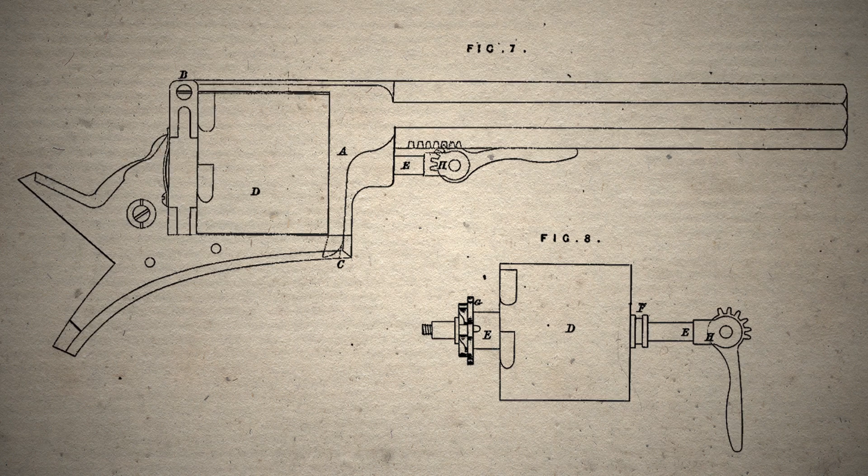Tranter would try his hand at a break-open with his 1868 patent, which featured a tip-up design using a manual ejector. In 1869, he'd further simplify this, although still an awkward affair. I'm uncertain if either of these designs were really produced.

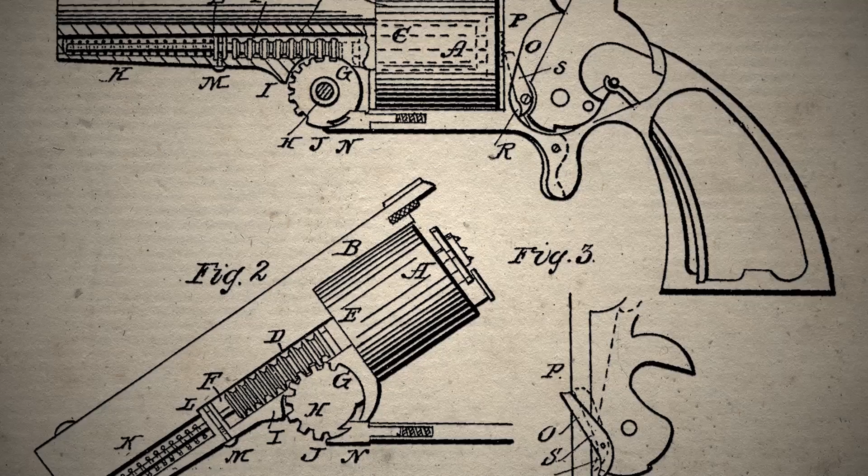A much better method can be found in Charles King's US 1869 patent for a rack and pinion extractor system, which automatically pulled spent cases from the cylinder when the pistol was broken open. This would famously be purchased by Smith & Wesson and used in their No. 3 series of top break revolvers. We've already explored this, at least as far as the Russians were concerned, although I'd like to revisit them again someday with fresh knowledge. The No. 3 Army-style revolvers would be well established in the market by 1874.

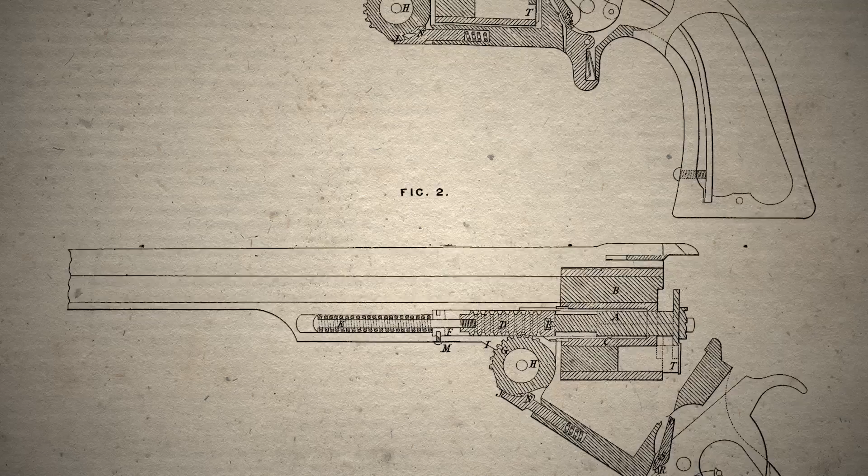Now I want to point out that today's episode is about British revolvers, which means Tranter will only be constrained by British patents at that time. Smith & Wesson rarely filed outside the US, but they did do so in this case with an updated King's patent in British hands still in 1869. The Smith & Wesson action wasn't exactly a strong seller in the British or European market though. Many felt the top break was interesting, but the extraction mechanism was complicated and frankly somewhat weak. But it wouldn't be long before a simplified action would emerge.

The earliest instance I can find of this is in the 1871 Belgian patent by Philippe Counet. Here, the complicated rack and pinion has been replaced with a simple finger. The top strap was latched with a crosspin, which proved to be a little weaker than desirable.

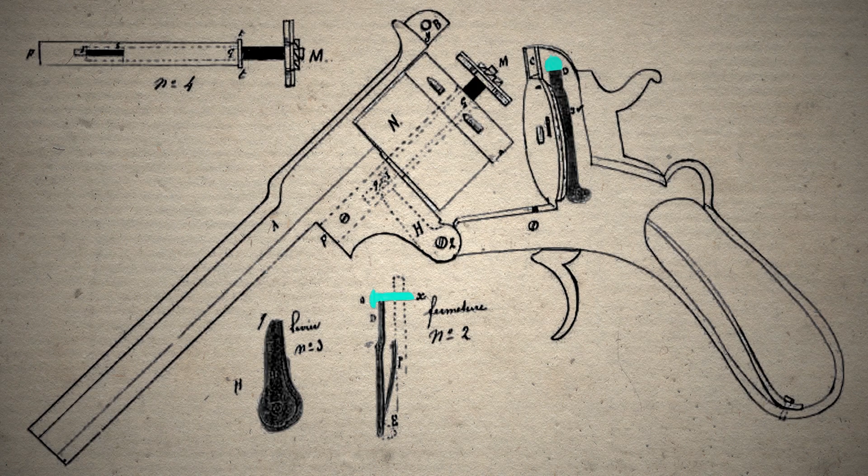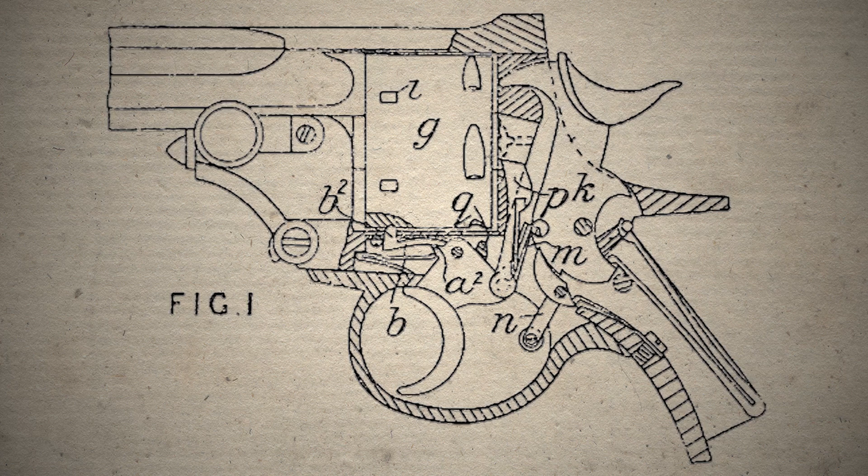Now, the Counet patent would actually become very popular in the British market, though it was marketed under the name Pryse at that time. I'm actually still researching the matter because, while there is a Pryse patent that shows the same top break mechanism, it is only meant to cover a specific cylinder stop. I've actually yet to turn up the Counet top break system in the British patent records as of this recording.

Regardless of how it was protected, the Pryse system would actually be picked up by several Birmingham manufacturers, eventually including the then just expanding firm of P. Webley. It's hard to say when this pattern first emerged in the British commercial market, obviously sometime between 1871 and 1877, predating our Tranter today for sure. The rapid extraction and loading system was popular not only with private buyers, but also when chambered for Army Standard 450 Adams cartridge, it saw brisk sales as an officer's private purchase.

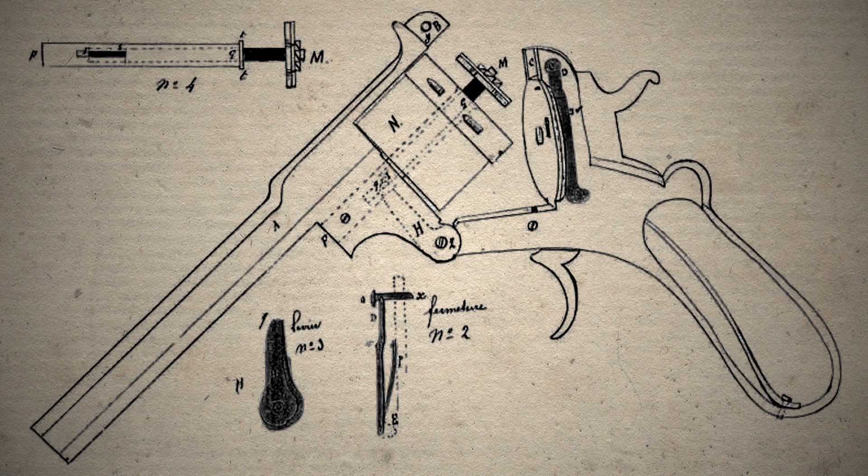But Tranter felt there could be some obvious improvements. For starters, that crosspin was a fairly weak latch, and likely to stretch or fail if paired with more powerful cartridges or if fired a great many times.

Interestingly, while not a claim of the earlier Smith & Wesson patent, there was a strong locking surface provided by King, a simple lug which fit into a matching hole in the top strap. In shooting the revolver, the barrel wants to go forward and the breech wants to go rearward, so all King had to do was keep that loop from being able to separate from the lug in terms of rotation. In this case, he actually just used a sliding latch.

Tranter would use the loop and lug, but paired it with a unique spring-loaded side lever.

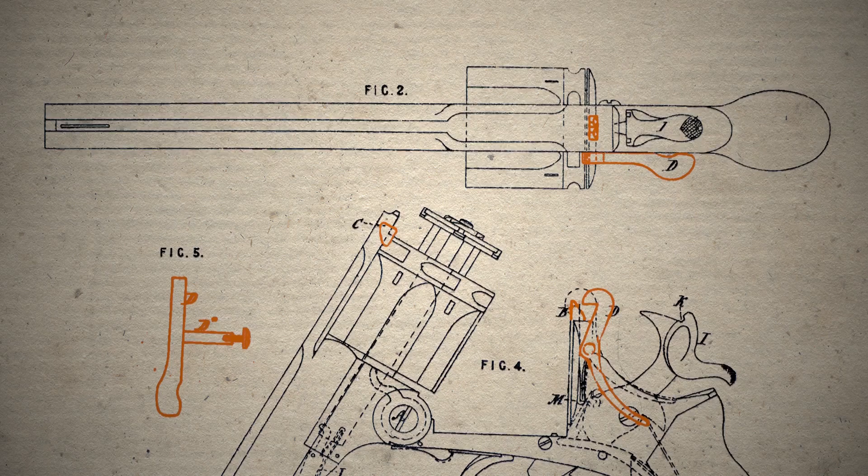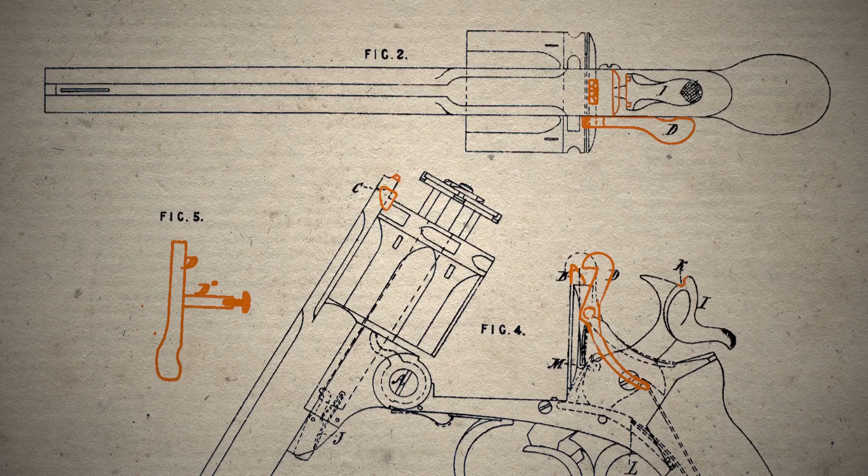This latched the action shut unless depressed in order to open it back up. It should have been strong enough to resist a forceful opening as well, but better safe than sorry, so redundancy was added - a notch on the hammer that overhangs the top strap when the gun is fired, literally at the moment of firing, guaranteeing the top remains sealed at the critical moment.

Alright, that's the top break lock improved, but what else can be done to improve over that popular Pryse? Well, you could further improve that ejector system.

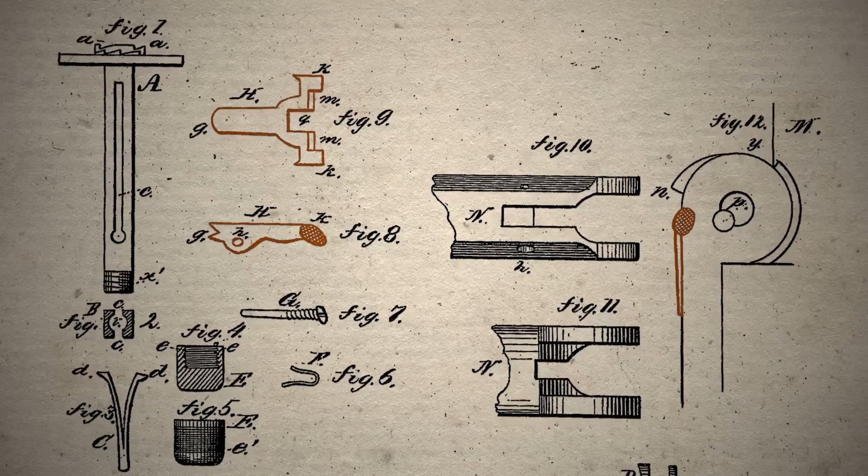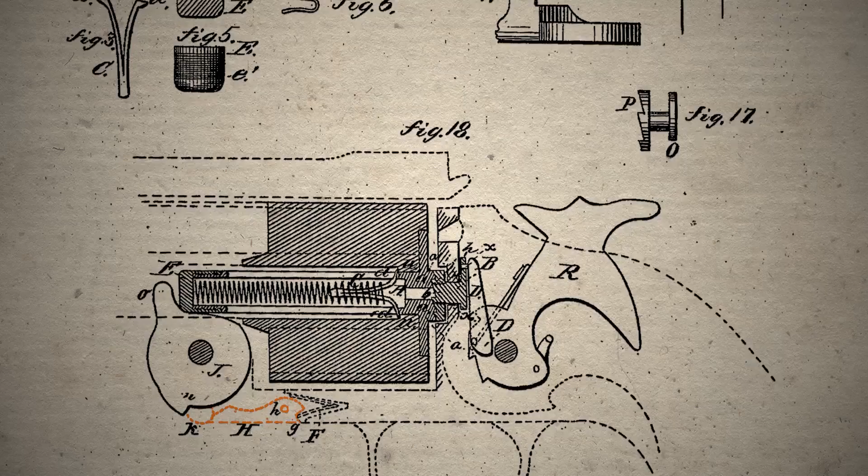Back in the US, the simplified ejector finger had also been discovered, this time by George Wheeler Schofield, whose 1873 patent usually takes all the credit, despite being preceded in Belgium on this matter. Building on Schofield's work, Daniel Wesson received his own protection in 1877. Here, a simple lever was fitted beneath the hinge point and acted as a brake or a release for the finger that pressed out the extractor whenever the gun was open.

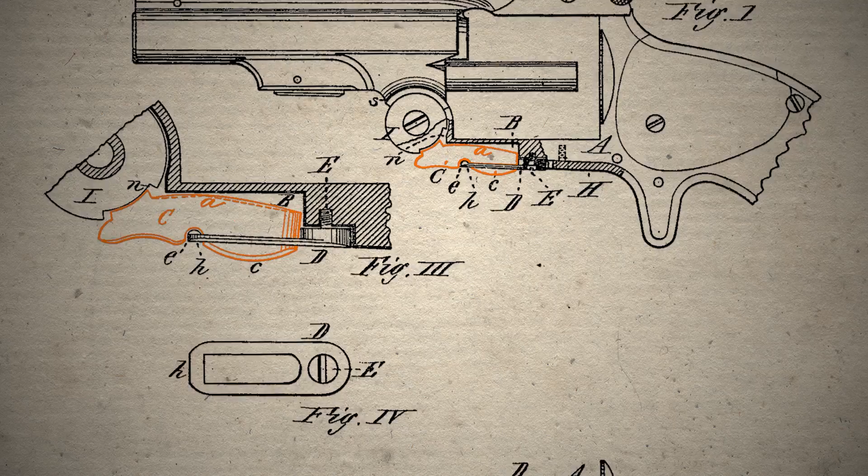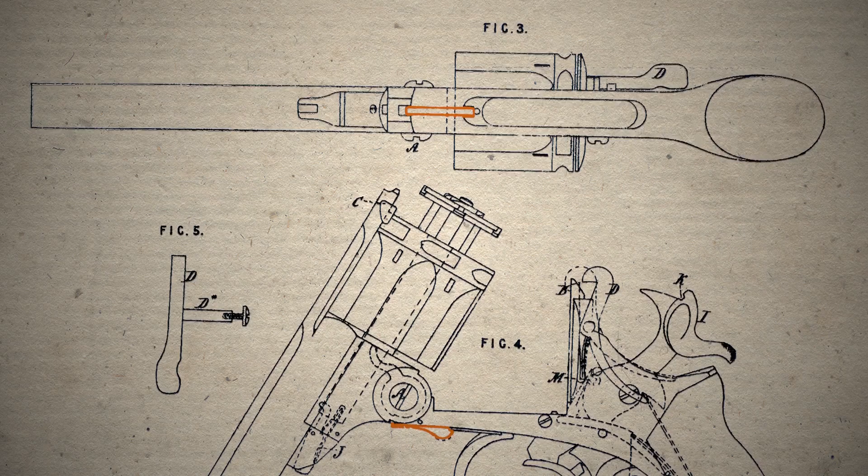So if you wanted to open the gun without spilling your beans, you just hold the button. Since Wesson wasn't going to patent it in Britain, it seems Tranter was willing to, and the feature was carried over. While we are here, by the way, we can see another new improvement.

This time it would be the Arbor Latch. On previous models, this was simply held by a cross screw, but Tranter opted for a spring-loaded lever with a press button sticking out the front of the action, making removal of the cylinder for cleaning or other maintenance extremely simple.

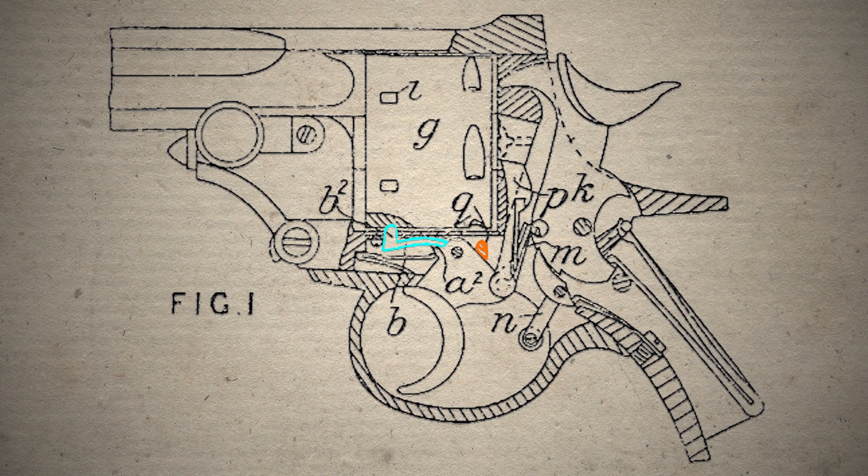The minor was likely taken from the chief competitor, the Pryse. This revolver used a pair of cylinder stops, one on the trigger that worked at the moment of fire, and another in front of the trigger, which allowed the top break action to close without crushing anything, and yet still prevented idle rotation when the gun was not in use.

Tranter would use a similar arrangement, although apparently just different enough to allow for a unique patent and avoid paying Pryse. Again, this was a crush-proof system for the top break mechanism.

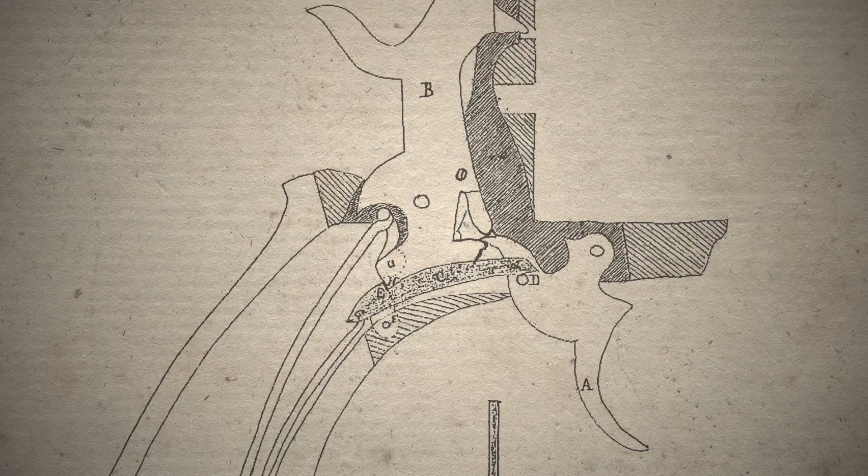Now, thanks to research from other episodes, we know that the original hammer Rebounding Arm was born from Alexandre Fagnou's Belgian patent of 1873, which was further refined in 1874 to cover a lockwork we've seen time and time again in later military revolvers. Now, in Belgium, Fagnou's patent had just preceded a similar concept from Jean Warnant, but in Britain, it appears that those two things actually arrived in opposite order.

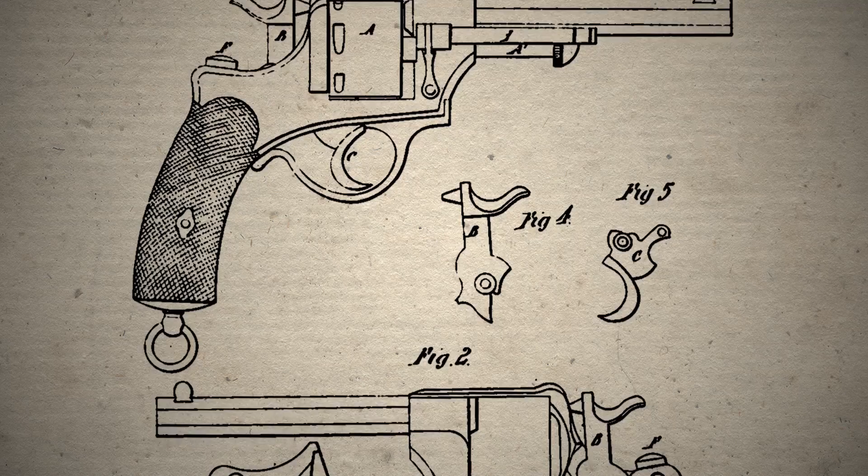While I only have the abridgment handy, this is Thornton de Muncie's British patent on Jean Warnant's rebounding lock. Thanks to this switcheroo and some choice mentions in Swiss trials, this is likely why we always think of Warnant as the rebounding hammer man in the US and Britain instead of someone like Fagnou.

In my digging, I've been unable to find a direct Fagnou British patent or even some communication by an agent. It's actually only been now that I was researching this episode that I found the first instance that I know of his separate rebounding arm being applied in a British patent at all, and it was done, actually very interestingly, by William Tranter. This rebounding lever here.

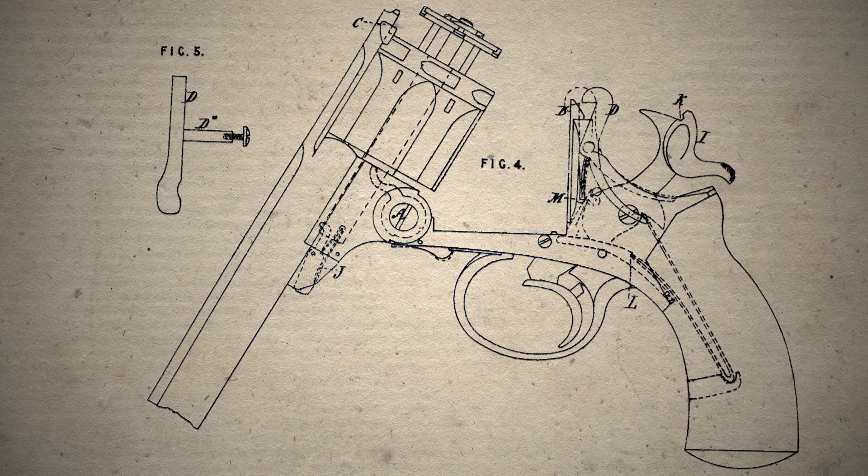This oddly shaped part transferred power from the lower arm of the mainspring into the hand and the trigger, and on releasing the latter, caused the hammer to rebound automatically, an ideal feature for a double action top break. So, same effect as the Warnant patent, but with one extra piece. It makes sense that it preceded it elsewhere in the world.

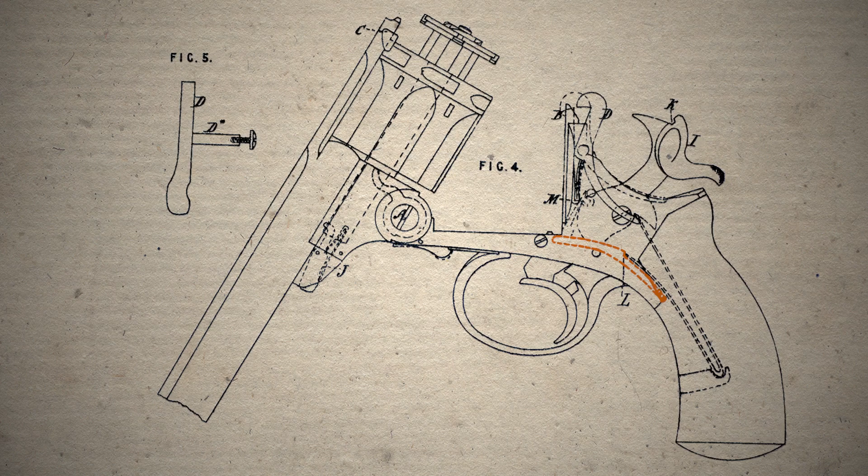Curiously, it may be that Warnant's own agent in Britain tipped Tranter off to the rebounding hammer issue. Some notes surrounding the confusion around what would become the 1880 Mark I Enfield revolver and subsequent legal actions thereof reveal that Tranter was asked to make an improvement to the Warnant lockwork for de Muncie in order to overcome a tendency to misfire. This would mean his own potential competitors tipped him to the new technology and might have prompted him patenting, well, a more Fagnou-like rebounding mechanism of his own.

Alright, with all that sorted out, we ultimately ended up with this. Releasing in 1879, it would be marketed as, you won't believe this, Tranter's model of 1879 self-extracting army revolver. So let's get a closer look. Alright, we have what I believe is one of the most beautiful revolvers ever made.

Perhaps not this example, it's actually lost most of its finish on the barrel. Definitely this guy sticks out in the wind and has lost some finish, and that cylinder is about gone, but it's beautiful to me, right?

Mostly for the mechanism though, so let's talk about that. Let's see, we've got, well, it's clearly British. I don't know how to explain the Britishness of the lines, but you guys are getting used to this. And because it's British, we know that it must have both single action, in which we cock the hammer back and then pull the trigger to release it, or double action, pull the trigger all the way through until our hammer goes whomp, crashing down.

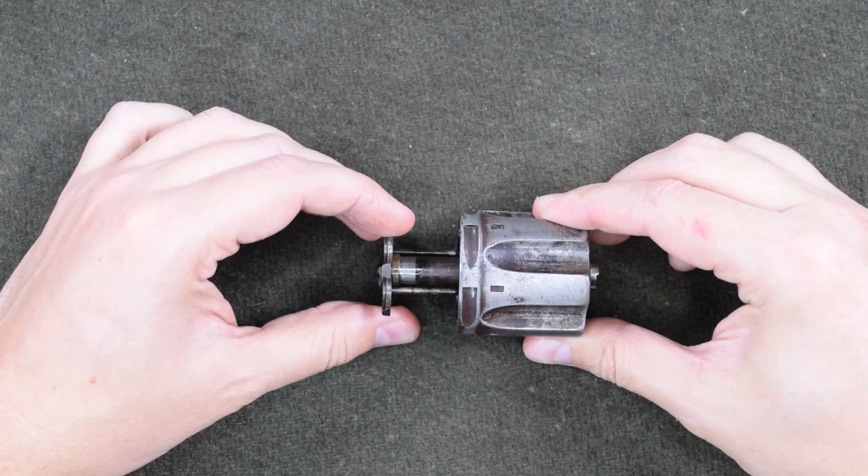And that's it. So this little button is attached to a little hook. That little hook hooks into this little square, and that retains this arbor the entire time we're using the gun. It is that easy to get into the cylinder. And as you can see, right down the center is our extractor. So you can even pop her out and do a good cleaning job. Make sure you align with that pin, get her back together, and you're back in business. This part of it's actually very easy to access for cleaning.

Unfortunately, that doesn't spread to the rest of the gun, because even though we have a side plate with screw a la the 1868 model, although not with a hollow axis pin for the hammer, the actual screw is the pin for the hammer. Not my favorite, but that's how she's set up. Unfortunately, this means that we can't go any deeper into this gun without first compressing this spring, removing that screw, pulling this whole guy off, and then we can access the side plate in order to see a lock work that frankly we can see better in our animation anyway.

Now, while I have the cylinder out, let me show you this particular stop here, which is spring loaded such that I can, let me see if I can do this for the camera without losing focus, I can press down on it. That means that if we put the cylinder back in this gun and snap it closed and one of the stops is not aligned, we're not going to crush or break anything. We're just gonna have this guy spring into place, and then the minute the cylinder rotates one way or the other, it's gonna pop up and do its job, right?

When we fire the gun, the actual stop, the one that's working at that moment, is this guy. It's cammed the other one down, and the one that's directly attached to the trigger is forming the stop at the moment of fire. Again, this will be a little easier to see in our animation. Since it's not very easy to get inside this gun, let's go ahead and cut straight to the special effects with some help from Bruno.

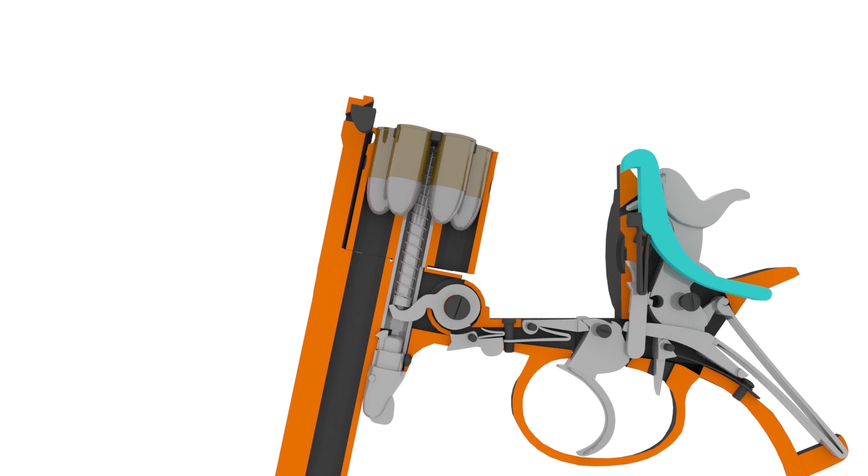When the lever strikes the sear, it's halted in place, and its finger-like extension forces the extractor out of the cylinder. Once the frame is fully opened, a projection on the upper assembly tips the sear, freeing the rotating lever, which allows the extractor to spring flush. From here, we load our 6 rounds and close up the action. Note that as we do so, the lever is shaped to cam out of the way automatically, springing back over the top strap latch.

This lockwork should seem extremely familiar, as it's basically the same as the Webley RIC we saw before. Manually cock back the hammer for single action, and pull the trigger through for double action fire. One minor difference can be found at the top of the strut, which now has an added little extension at its top. We believe this was done to make it easier to adjust timing at the factory.

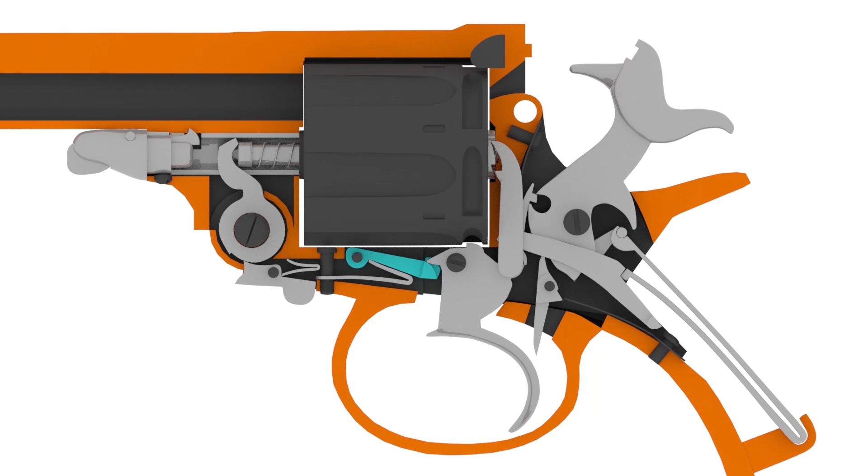Looking at the trigger, we have the same old cylinder stop projection added to the top rear. This halts the cylinder's rotation when the trigger is pulled to the rear. Again, different from the RIC, this Tranter has an added cylinder locking bolt. It's powered by its own V-spring and cammed by an extension off the front of the trigger. When the action is at rest, the locking bolt springs into the cylinder, preventing rotation at rest. As the trigger pivots, it cams the locking bolt down, freeing the cylinder to rotate until it again strikes the stop attached to the rear of the trigger.

And finally, the most important change is the introduction of a rebounding arm. This odd piece is biased by the mainspring, wrapping around the hammer. Its extension fits into a notch in the hand, pressing it towards the cylinder and downwards, which in turn resets the attached trigger. The rebound lever also, unsurprisingly, rebounds the hammer, thanks to a shelf-like cut that meets an extension at the bottom of the hammer. Releasing the trigger causes the rebound to spring into the hammer, tipping its bottom forward and its top rearward, thus clear of the cylinder.

Now that we have to unload the revolver, let's get another look at that ejector system. This time, we'll focus on the extractor itself. Currently, the extractor star is flush in the cylinder, basically forming a section of the various chambers. It's attached to a central pin, around which is a coiled spring, constantly pressing the pin, and therefore the star, into the cylinder. As we open the action, the previously noted rotating arm forces the extractor rod out of the cylinder, and its accompanying spring is compressed. At full extension, 2 full-length locating pins keep the extractor from rotating. Watching the spring again, once the forward sear is released, the arm is freed and the spring snaps the extractor back into place. Ready for reloading. Now, time to go shoot it.

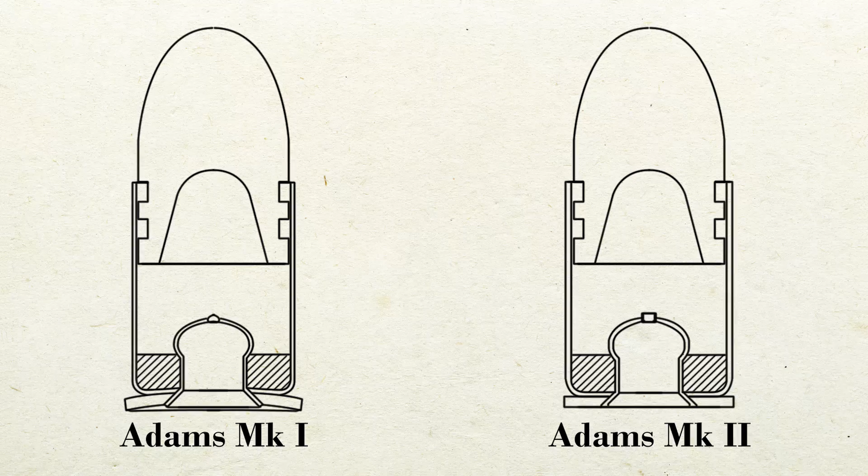Now of course, the Tranter 1879 began its life chambered for the only available service cartridge, the 450 Adams. However, this cartridge started life as a conversion method for the old percussion Adams revolvers. It was designed to be milder, so of course, it didn't garner much appreciation for its, let's say, knockdown power. As an added problem, the Mark I and Mark II 450 Adams used a two-piece case construction. At first, the base rim was iron, but later this was swapped to brass. Both had a habit of being torn off if a case became stuck, and was extracted rapidly with a star-style extractor. Oh, say like on a Tranter. Yeah, that didn't test well with the government, which is actually somewhat unfair because it turns out they weren't going to stick with the 450 Adams anyway.

Envious of the American 45 Colt, a hard-hitting but yes, heavy recoiling cartridge, it appears the government men focused on a compromise of sorts. And welcome to one of the most immediately confusing cartridges in handgun history. The Enfield Mark I cartridge of 1880 is actually a slight mystery, as very few were ever made before changes began, resulting in the much better known Mark II of the same year.

Now here is the thing to know. The Mark I had a .455 inch diameter bullet. The Mark II, while different in construction, kept the same diameter. The very next year, the Mark III cartridge dropped, now increased to .476. Just to be clear though, none of these are 455 Webley. That came later, and it's often confused for these cartridges.

For our story, the most impactful cartridge would be the .455 Enfield Mark II, which thankfully the Tranter revolver could be chambered and proofed for without too much fuss. It also allowed some backwards compatibility with 450 Adams, although I doubt precision was super high. So, early Tranter 1879s, like mine here, will be marked and proofed only for 450 Adams. Later, they will display markings like 450 or 455 center fire.